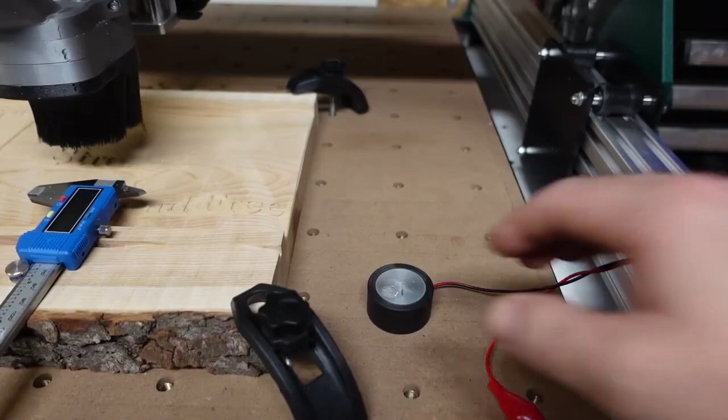I'll also take you through a little process to get you the most accurate thickness of your Z probe. Okay, so here's our standard Z probe that comes with our Silverback 6060 and our Mandrill 3036. It's approximately 20 millimeters thick. However, that's not the actual thickness, and they do tend to vary slightly. I'm going to show you how to take a proper measurement so you have the exact thickness that you can input into your sending software, whether that be gSender, OpenBuilds, or Easel.

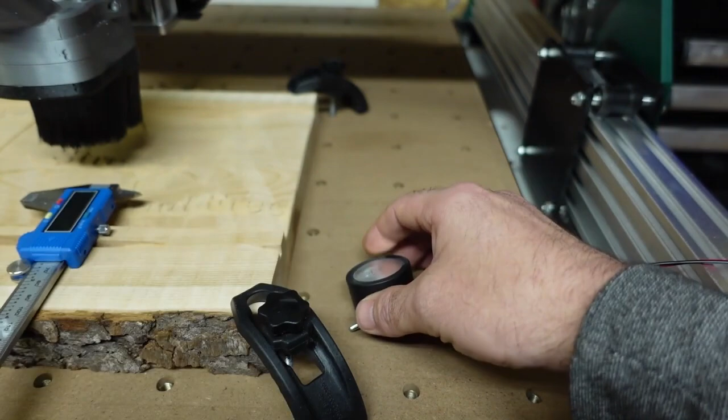I use a set of calipers. I'm going to have this in millimeters, as most of you probably use millimeters for your measurements. I do personally prefer inches. So first you're going to loosen the locking nut on the digital calipers.

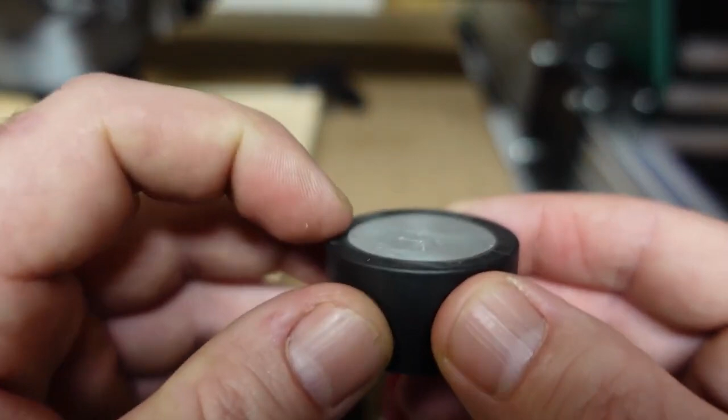And so I got the thickness of the housing, which is 20.07 millimeters, and that's from the bottom of the housing to the top of the housing. But you're going to notice that there is a slight recess to the actual plate. Get close. Yeah, there we go. There's a slight recess, and that actually accounts for a little bit of air carving if you don't minus that from the housing thickness.

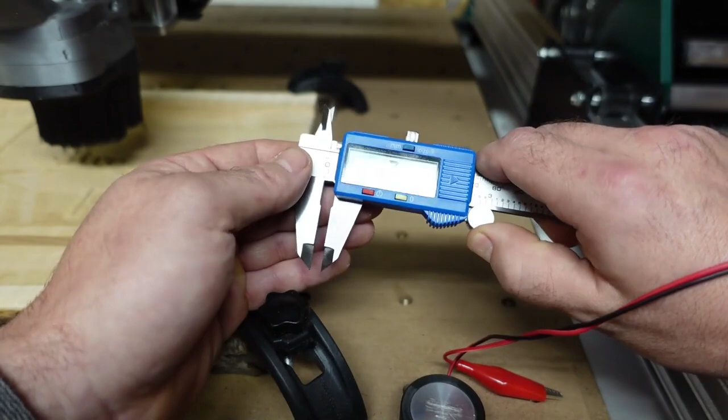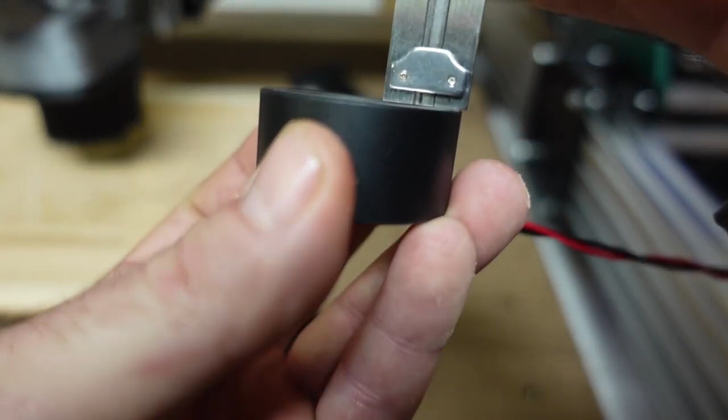So with these calipers, there is a nice depth gauge, so just make sure to always zero, because when you go forward and you come back, sometimes it's not always zero. See, it's working today, sometimes it doesn't. But if you lay that flat on top of the housing like so, and then slowly bring down the depth gauge till it hits the plate, you're going to get a number, and I got 0.49.

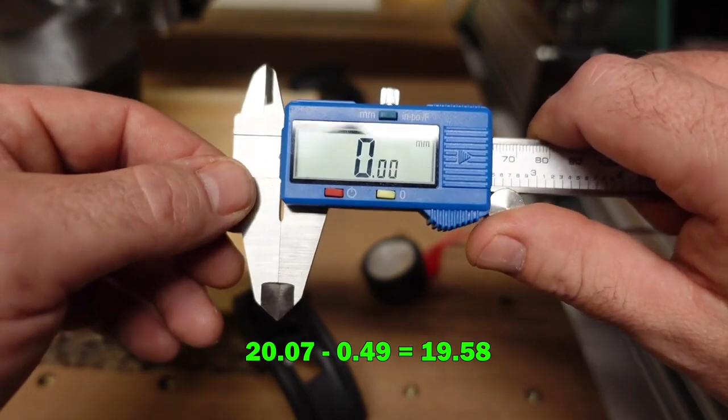So you minus 0.49 from 20.07, and that'll give you the actual thickness, which will be about 19 and a half millimeters or something. And that's what you will input for your probe thickness, and that'll get you the actual distance from your material to where it registers the signal.

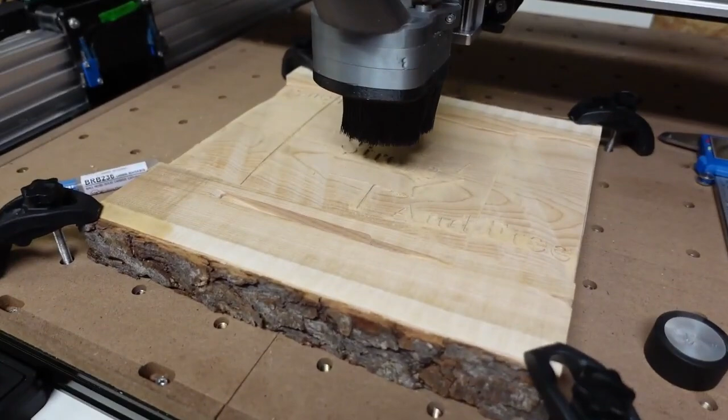And you'll notice that I have a carve that's already partially done. I went through my detail, and now I'm going to be doing my cutout. However, you can't zero to where it's been carved anymore, because when you do your toolpaths, it's always going to calculate the actual thickness. So with this piece of wood, I have two options when I calculate my toolpaths, because I do have some wood that hasn't been carved that is still the exact same thickness as what I inputted into my software in my toolpath.

Or if you don't, sometimes I don't have either A, enough, or B, it's uneven and you can't get an accurate measurement. You can also zero from your machine bed. That is software specific. I don't believe there's an option in Easel, but if you're using VCarve Pro, Aspire, or Carveco, you have an option in material setup to zero from the machine bed, and that does all the math for you.

It takes into account your Z-probe thickness, your material thickness, and it'll do all the calculations for you, and it'll come to the top of your material and start carving. And that's really good for 3D work if you have no way to zero your Z on the material anymore.

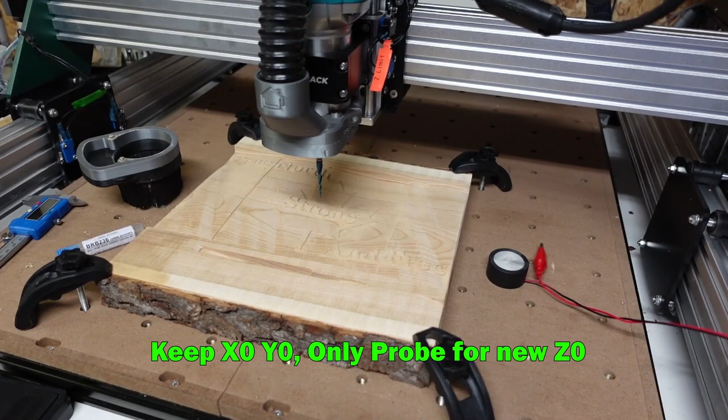Okay, so as you can see, I have a 1/16 tapered ball nose inserted into my Makita right now, and I'm at my 0, 0 position. It finished its carve and it went right back to its XY0. So we don't want to change that, because if you do change those 0, 0 values, then it's not going to line up with your next bit.

And so all you have to do is just jog. So we're gonna go over to the machine bed where the Z probe is, because in my toolpaths, that's how I calculated my Z0, on the machine bed, and we're going to align it so it's above. But I have to change my bit first, so we're going to do that.

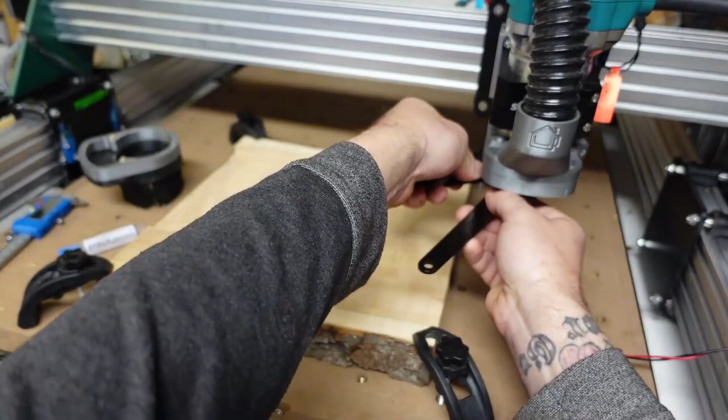Tighten the bit. Blow the dust off, because that could possibly add a little bit of height to your bed and throw off your Z. I always clean off the end of the bit, and then I will attach my clip to the bit, make sure that's under, and now I jog my Z down nice and slow just to get it close. That way it's not traveling for a very long time.

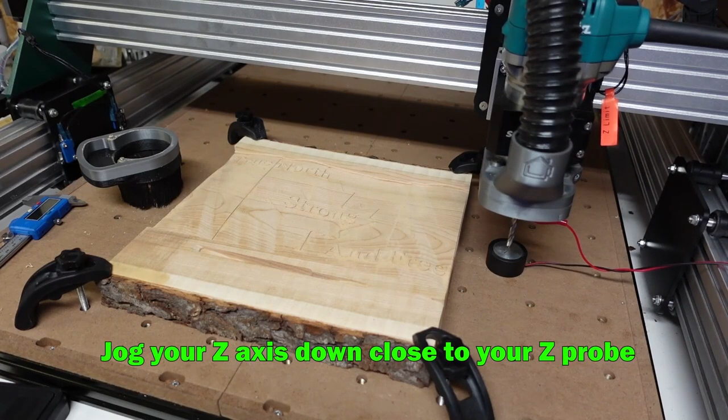You can set most sending software to send an error if it doesn't find the probe in a certain distance. So if you get it close, then you can avoid that. So I'm pretty close there, and I'm going to select my probe function, make sure it's communicating. Okay. And then I'm going to start probing.

This is going to go through it twice. I use gSender software, so it does one quick pass to find it, and then it does a slower rate to get a more accurate depth. And we are now done. Alright, get that out of the way. And now we're going to jog it up till it's above the material. And then one more just to be safe.

And we're going to jog back to our X0. And in gSender you can just click on the X and it's just going to move your X-axis. It's not going to lower your Z-axis. It's not going to move your Y-axis. So I'm just going to click go to, and it's going to go across. And I got some clicking in my wheels. That's okay, doesn't affect anything. And now we're ready to carve.

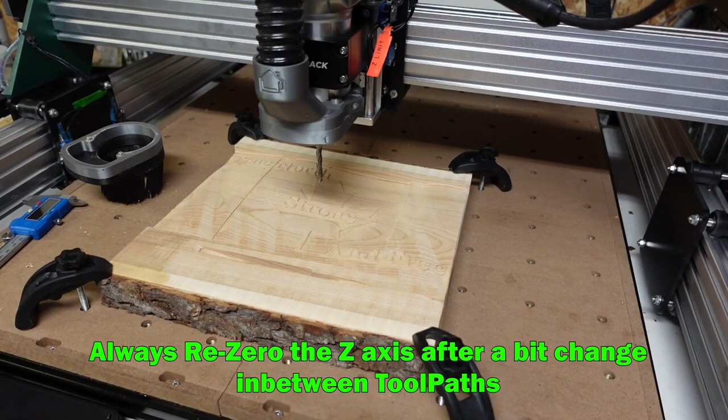Normally I would just take this to the table saw and rip the edges off, but I was going to show you zeroing from the machine bed for your Z, how accurate it really is. I'm going to quickly show you what you can also do after a bit change, because you're never going to have an exact depth because we don't have bit setters. So you're never going to be able to put that in the perfect spot and have the same exact length from your collet to the end of your bit ever. So that's why you always have to reprobe your Z0 every single time.

And so for Easel, for instance, if you're just going to do it on your machine bed, always pick the same spot you did your original zero from, which I would have probably done from somewhere here anyway. So then you would just jog it down, and then you put the Z probe underneath and you probe it there, and then you just go back to XY0. And then you're good to go. You can start it right up. So that's what we'll do now.

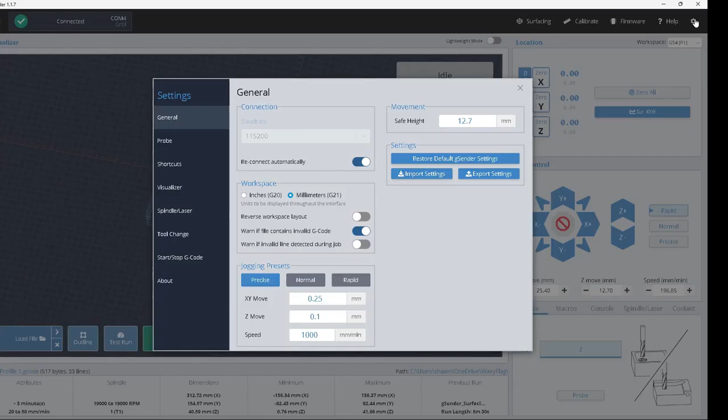Okay, so I'm just going to show you what I couldn't show you when I was jogging the machine in the software that I use. This is gSender, and in gSender, I'll put it to millimeters for you, but you go to settings, probe, and then you input the thickness that you get. Yours is going to be different than mine. Actually, I think after using mine for a while, it's different than this one, as this computer isn't currently attached to my machine, but yeah, you will change your Z probe thickness in your settings.

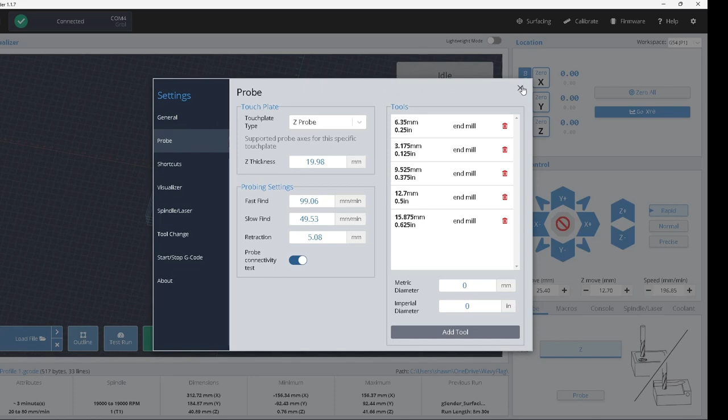OpenBuilds, Easel, all similar, different ways to get there, but you need to put that in all those programs as well. But what I like about gSender is it can give you a pretty good visualization without the machine actually running. So you will X0, Y0 right here, wherever it is. I have the center on my projects.

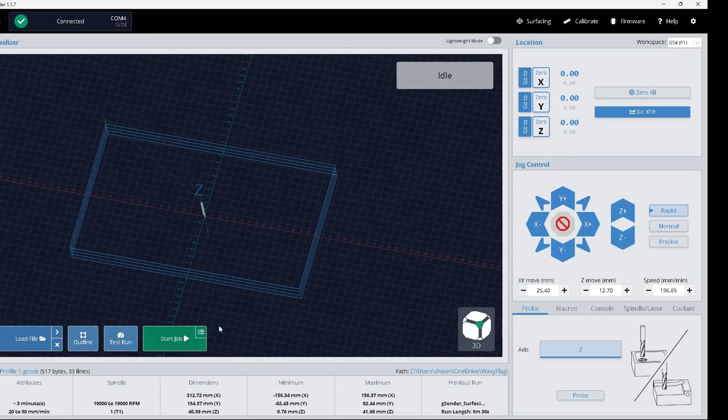If you do the bottom corner, then you won't have these negative squares. You're only going to have this up here, and your whole square will be on the positive spectrum of this graph here. But since mine's in the center, that's why it's represented this way. So all I do is just raise my Z up. You can see in the animation it's raising it up, right? And then I would jog it.

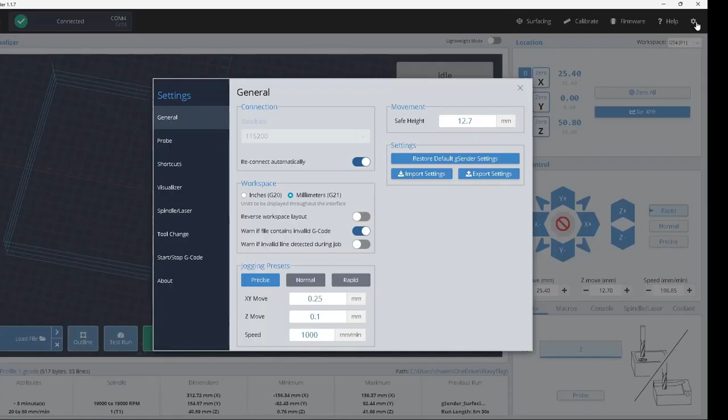Oh, I got millimeters set way too much here. Oh God, this is slow. So then I would jog it. I'm gonna go back and put it back to inches. Hold on a second here. Boom. And it'll be a lot quicker. So now it will move inches.

So you just jog it off the material when you want to do it on the bed or wherever your z-axis is, or your z probe is. So, and then I'm over the 8-inch mark, and then I would select my probe settings. I can't touch it, it's not connected, so I can't go through it, but then you would just hit go to, and it goes back.

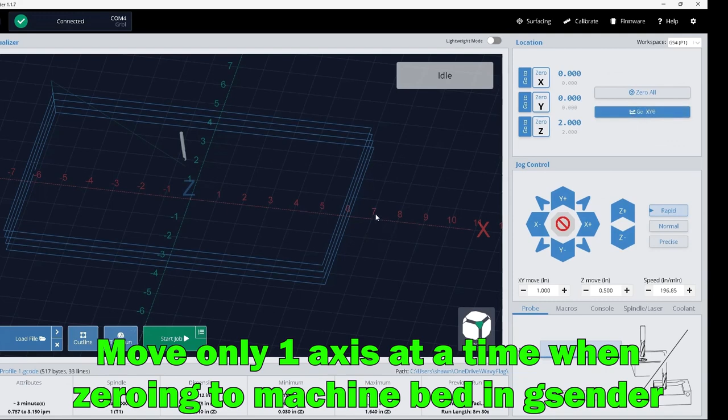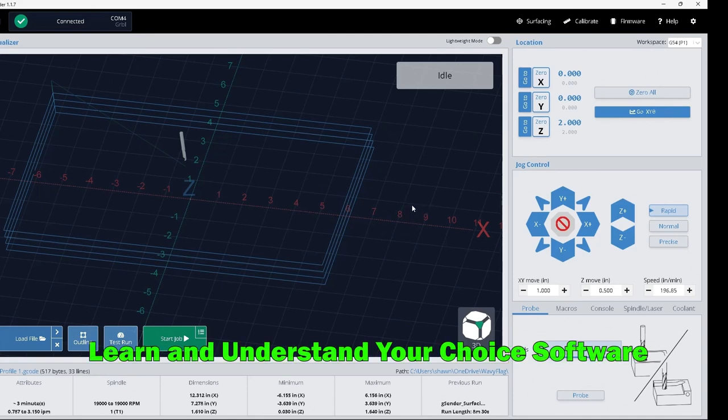Don't hit go to X0, Y0, because it will lower your bit just to its safe traveling height, but it's not going to take into account your material thickness, because that is in the G code of your file and not within the software. So the software is going to think that it's going to be safe for your safe height travel, and then it'll more than likely bang back into your material.

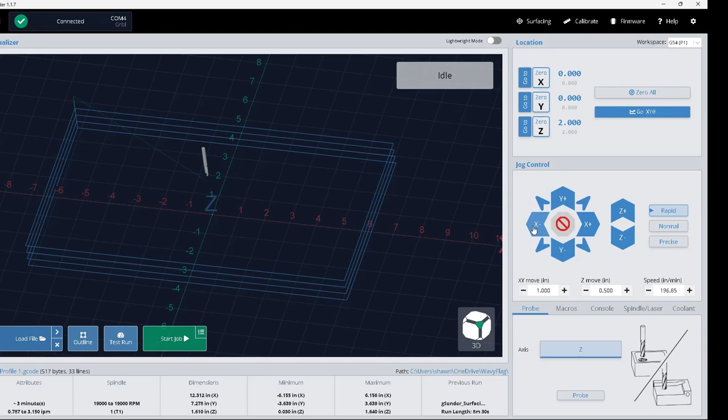So if you hit just go to X, that's the only axis it's going to move. I don't know if OpenBuilds is the same, and I'm not 100% sure if that's the same if you're going to use Easel as your sender software. But that's just something to keep in mind. Worst case scenario, if you don't have that option, just use the jog functions and move the exact same amount of times you moved to go over your Z probe. So you can just do it this way as well. And then it goes right back to 0.

Okay, so setting up your CAD software for your cuts is pretty generic for all the CAD softwares. VCarve, VCarve Pro, and Aspire, they're all the same, those three. Carveco is a little different, but same basic idea. Easel, again, a little different, but same basic idea. However, Easel doesn't give you this option to go to the machine bed, I believe, and Carveco does, but they label it top and bottom. So you go through your steps, your job type, and then your job size.

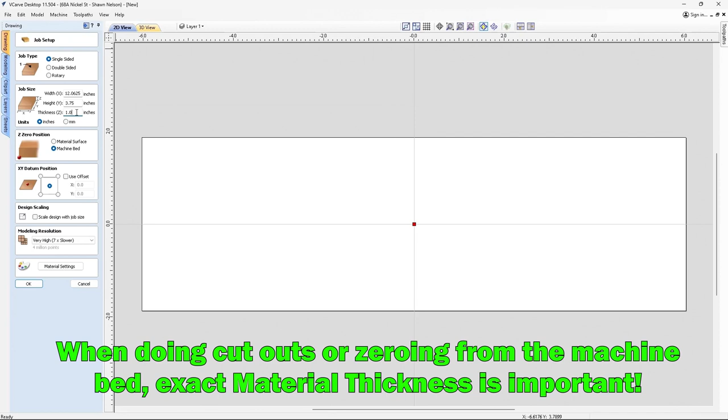What I find important, specifically when doing cutouts or zeroing from the machine bed, I need to know my thickness exactly. So the material thickness can't be approximate, it needs to be bang on. So if you have a piece of material that's 1 1/4-ish inches, you're going to want to find out what that difference is, because if it's just shy or just proud, you can run into air carving or bit dragging, which can damage your bit, throw off your axes, and ruin your carve. So keep that in mind.

I get into a habit of trying to put the exact thickness that I'm going to use every time, even if I go back after, because I know I sanded it or I surfaced a piece of material or planed it. I'll go back after I've designed it and reset the thickness of the material to the new dimensions. So don't forget that aspect of this. And again, Easel, I don't believe can position. If you design in Easel, you're not going to be able to do your zero from the machine bed. But if you design in Carveco or VCarve and use Easel as the sender to the machine, you can still do this. Easel is just going to read the G code that's been generated and do it that way.

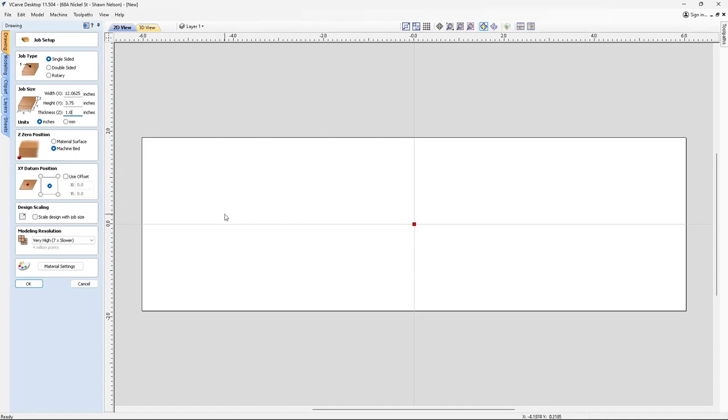Okay, you're going to notice that I didn't cut all the way through my material, and that's because I set that up in my toolpath that way, just because I didn't have a sacrificial piece underneath, and I knew I was just going to take this to the table saw and just cut it out anyway, because there were no intricate corners to cut out.

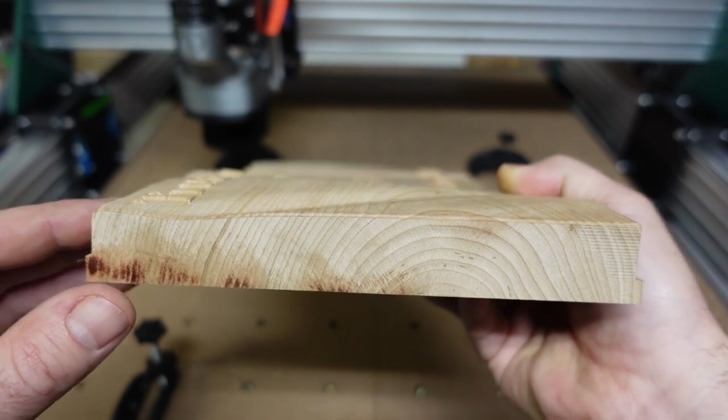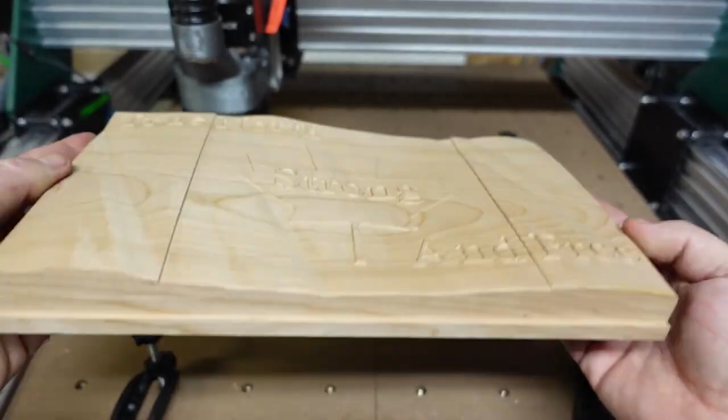So I just wanted to show you guys how to set onto the machine bed if you can't do it on the material, and that it still does an accurate cut, and it still knows where it is, and it's possible to do multi-bit carves, 3D carves, if you have nowhere to zero on your material. However, that will be limited to software to do it easily, and as I've stated, Carveco and VCarve both have those options very easily, and you don't have to worry about doing anything in your sender software. So there's the profile, there's the piece.